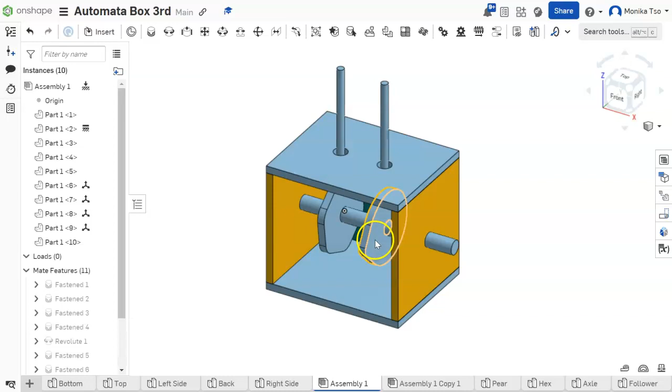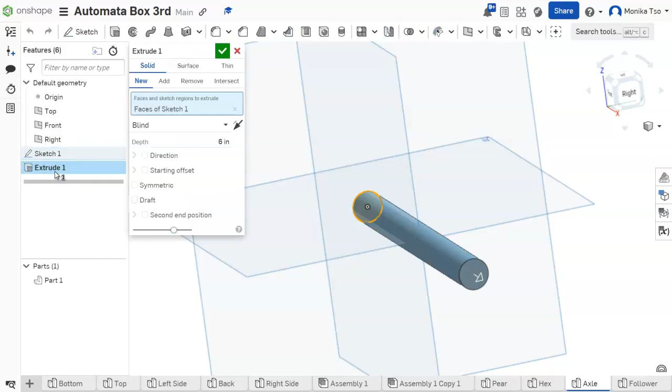First thing we had to do was draw out these cams. We used a hex cam and a pear cam for this activity, and we have to draw out the axle and the follower. So let's start with the axle because that's pretty simple. All we did was draw a circle on the right plane, dimension that to be 0.5. Then we extruded that circle 6 inches. That gave us our axle.

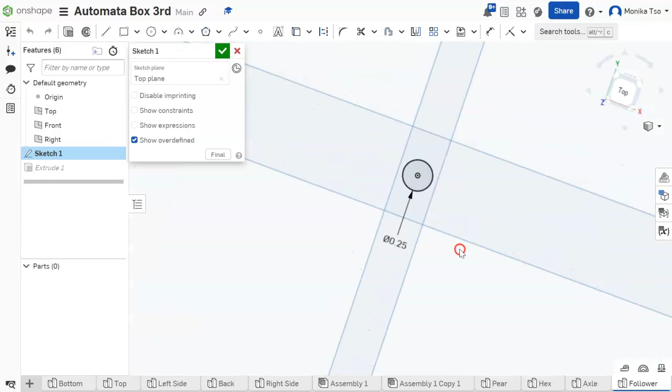The follower was pretty much the same thing. I just drew this instead on the top plane because it's going to be facing up and down. And this was a little smaller. So my circle, instead of being a 0.5, is now 0.25. So a quarter inch instead of a half inch. And that extruded, I did 4 inches for that one, a little bit smaller. We didn't need it to be quite as tall. All right, so those are our two axle and followers.

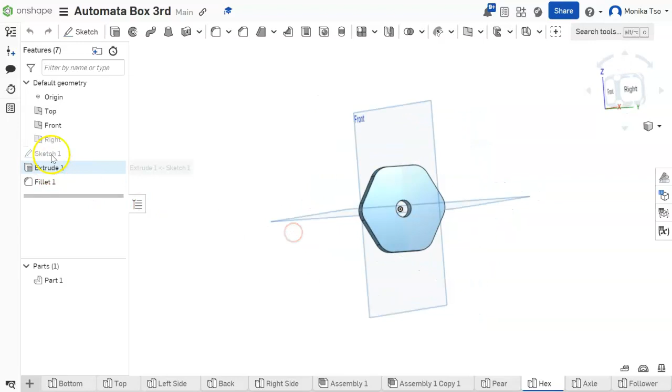We also drew a hex cam, which was pretty simple. I drew this on the right plane. Here are our dimensions for the hex cam. Of course, we used the polygon tool. Inscribed polygon is the one we used. We dimensioned this inscribed polygon to be 2.5 diameter. It's a hexagon, so make sure it had 6 sides, so 6x.

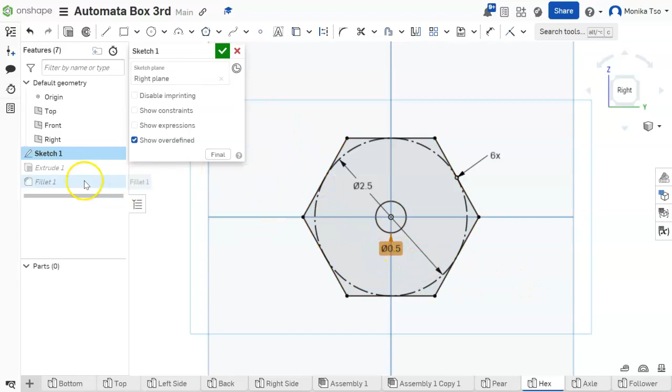And we needed that little hole in the center, so we have a hole here in the center, measured at 0.5, the same width as our axle. Once we had that done, we went ahead and extruded it a quarter inch, 0.25 on this extrude. That gave us a nice hex cam.

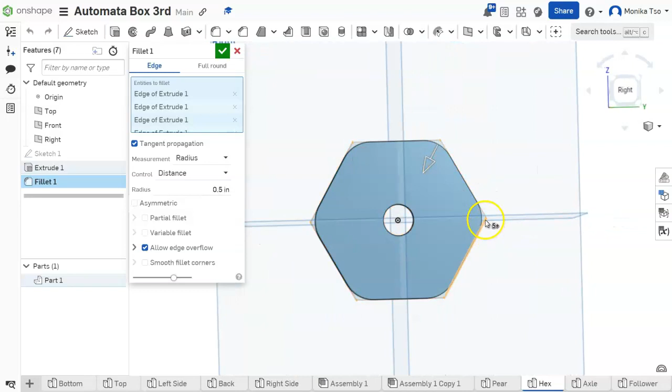Last thing we had to do was add a fillet, because if we don't do this fillet, these sharp edges, when we tried to rotate this hex cam, we were having trouble with our follower guiding these edges. So we got to make sure that we round those off a little bit. So you can see it's not as sharp, it's kind of rounded off. So I used the 0.5 inch fillet here.

I think you can go smaller than that. I think mine was a little bit too rounded. You might try maybe 0.3. That might probably work for you. But that's the last thing we did, is we rounded off our edges using that fillet. So that's the hex cam.

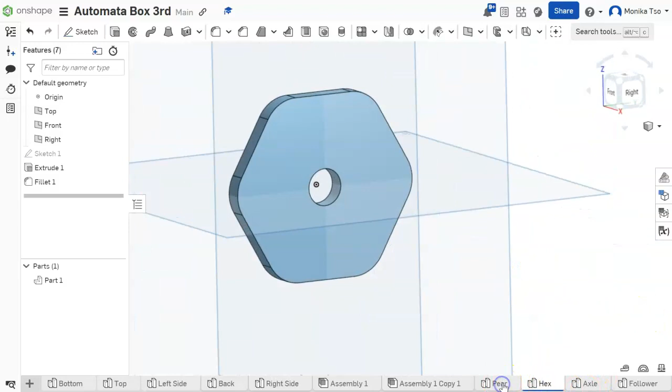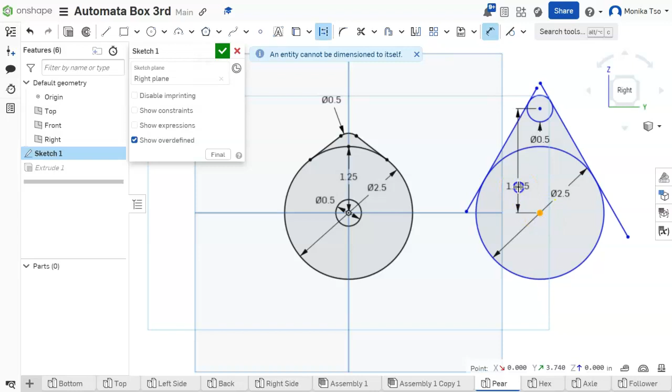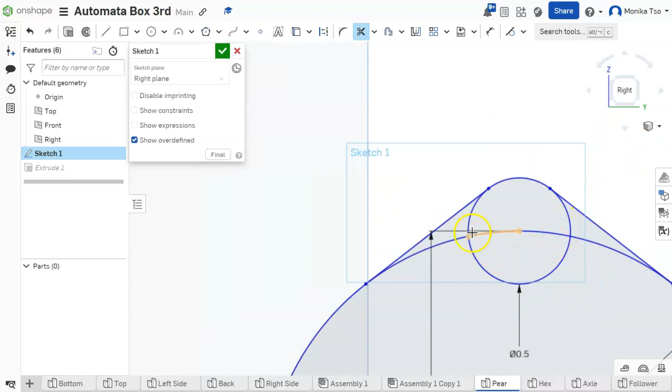All right, so that's 1.25. So you can see that it's kind of matching up now. We have to use this trim tool, our scissors, just to get rid of these extra lines. Along with these ones up here on top, we don't need these. We'll get rid of those. Let's get rid of the small circle. And I think that's good enough.

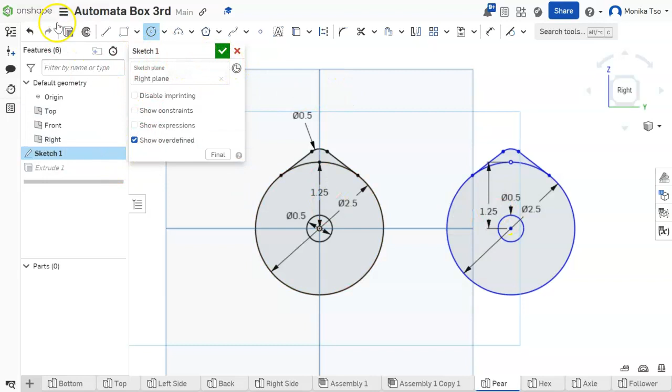That'll extrude just fine. So we're going to need to also add this small circle in the middle for our axle. And again, that's going to be 0.5, the same as the hex cam. All right, now we're ready to extrude it. So I'm just going to hit the extrude. All right, and we extruded these 0.25. All right, there we are.

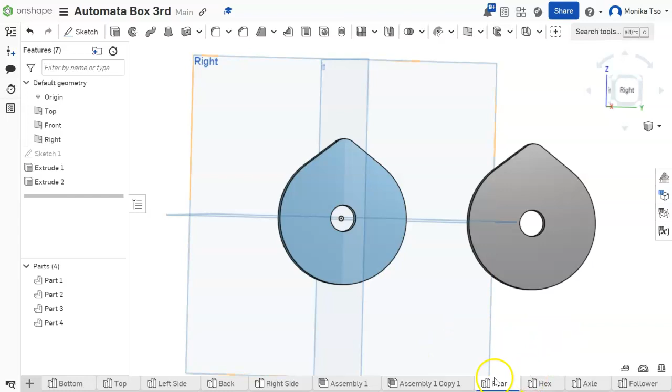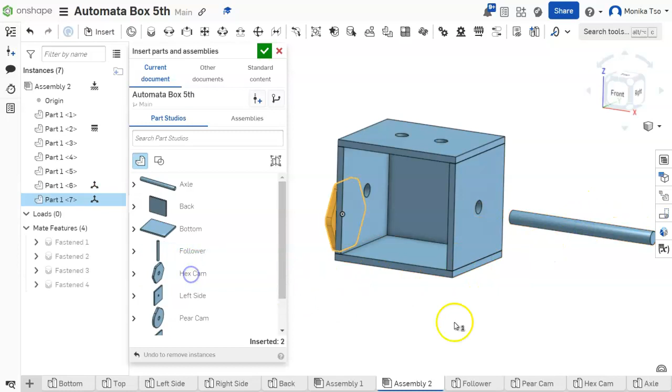Now we're ready to add these to our assembly. So we got our pear cam, we got a hex cam, axle, our follower. So we go to our assembly. And let me do this assembly with just the box. So now that we have the box, we need to add the axle. All right, we're going to put that in. We're going to need our hex cam, and we're going to need our pear cam. So bring those in for now.

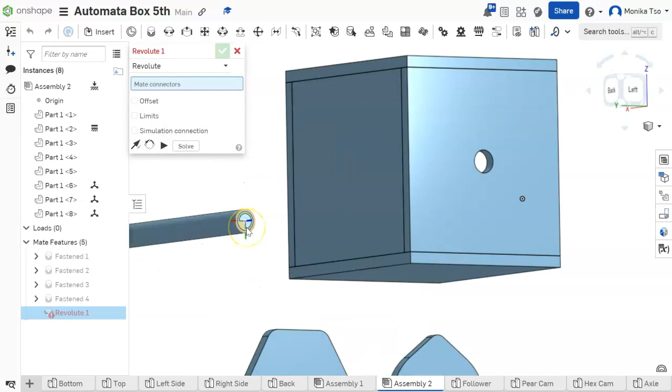All right, so for our axle, we're going to use a revolute mate, because we want this to be able to revolve. So to use my revolute mate, I'm going to click on the circle at the end of my cylinder, or my axle. Then I'm going to click on this circle over here on my box, and you can see that it's now attached. And if I hit play, you'll see that it actually rotates the way we want it to. Okay, green check mark that. Let's go ahead and add some cams.

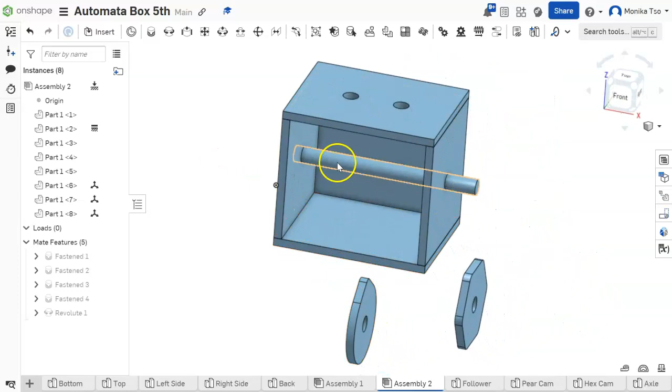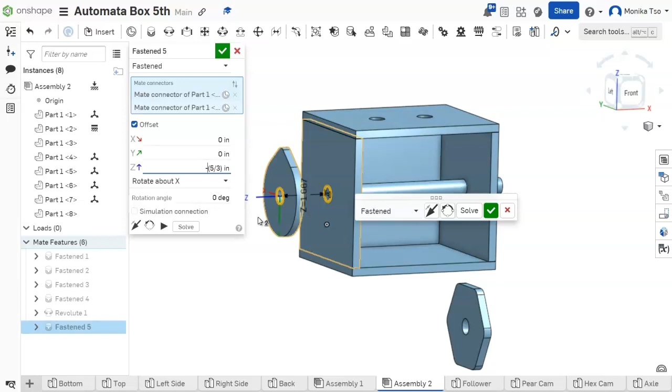So these cams, we want them to be glued to our axle. So we're going to actually use a fasten mate. So for our fasten mate, we're going to click on the circle over here. Then we'll click again this circle here. And we'll notice that it's not in the right place. So we're going to have to use an offset right here. And I'm going to offset along the z-axis 5/3. 5 divided by 3. And that's the wrong direction, but no problem. All I got to do is put a negative at the front of this, negative 5/3, and it'll switch back to the other direction. So that's now fastened.

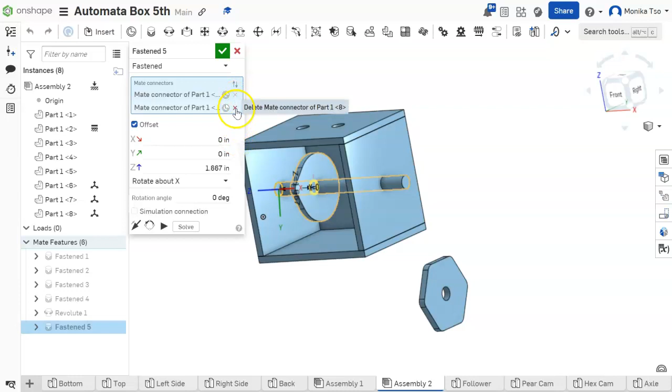I should be able to grab this and revolute it. Let me see if it'll animate. I might have missed a step somewhere. Alright, so I found a problem with my connection. I went back to my fasten and I deleted these, and then I tried it again, and second time it seemed to work okay. So if your cam does not spin when you rotate the axle, you might have to do that. Go back and figure out what happened.

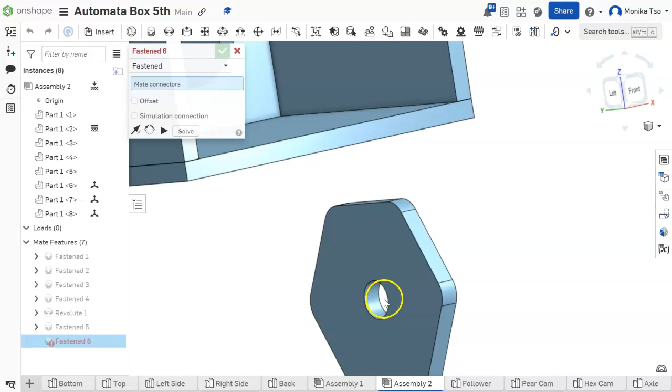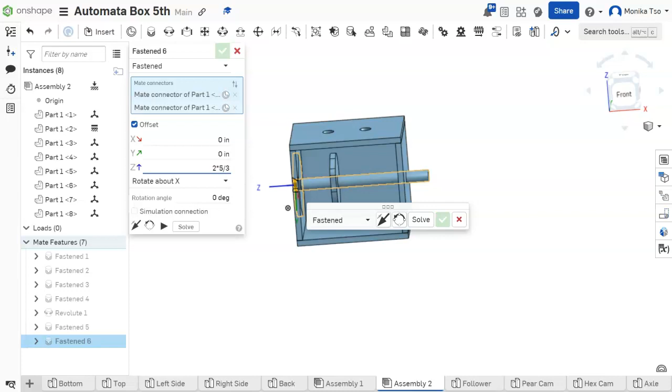So I'm gonna now connect the hex. So what I think I did was, I think you need to click inside this circle, or is it, no, wait, for this one you click on the circle. Then I think for this one you have to click inside the circle. And I think that's what needs to get done. Let me see. So now I'm going to go 2 times 5/3 for my dimension. That way it moves over. Oops, negative. And let me see if that one will spin. I'm going to grab my axle. Alright, that's good. That does spin indeed.

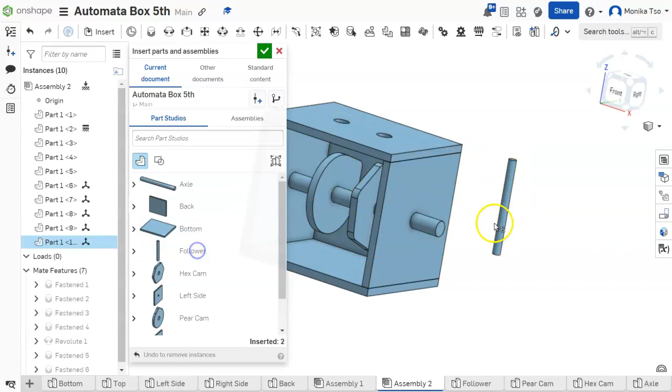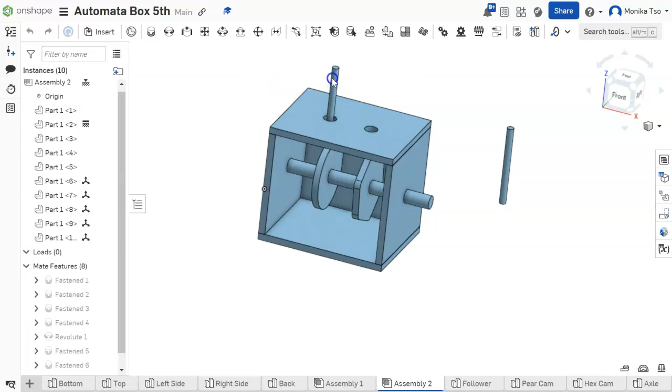Alright, so the next thing we need to do now that our axle is spinning our cams is to add the followers. So I'm going to insert 2 followers. 1, 2. Oops. Alright, to do the followers, we're going to have to use a slider mate. So find the slider mate. We're going to click the bottom of our follower, and then we're going to come over here and click on the top of our circle. There we go. When you move this up and down, it should slide. It doesn't go side to side, it only goes up and down. So go ahead and position that so it's just above the cam so we can still see it.

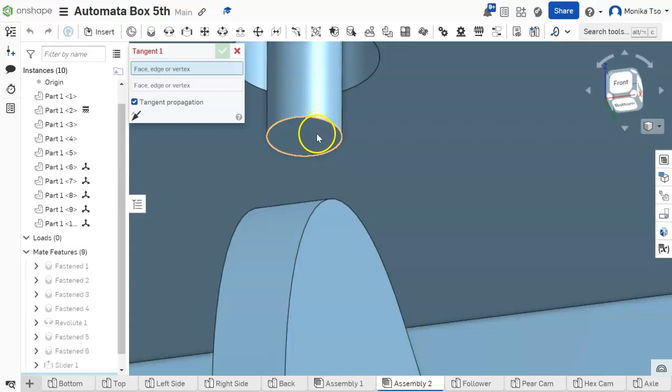Next thing we're going to do is use a tangent mate, which is this guy right here. For the tangent mate, we're going to come over here and click on the circle. Make sure that your circle is clicking on the actual circle, not inside of it, but on the circle itself. Once you click that, you're going to come over here and click on the edge of your cam. All right, you'll see those two get attached. You hit that green check mark. I'm going to spin my axle, and you can see that follower bouncing up and down right at the exact time. Alright, so that's good. So repeat those steps for the other follower and you'll be done.